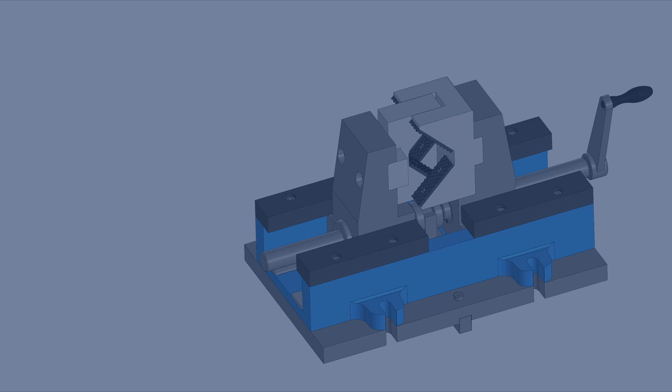In this lesson, we'll add 4 clamps to the assembly, 2 of which will be added by mirroring. Let's add the clamp. The vise assembly contains 4 such clamps. We need to place them onto the base on 2 sides. As usual, click by matings.

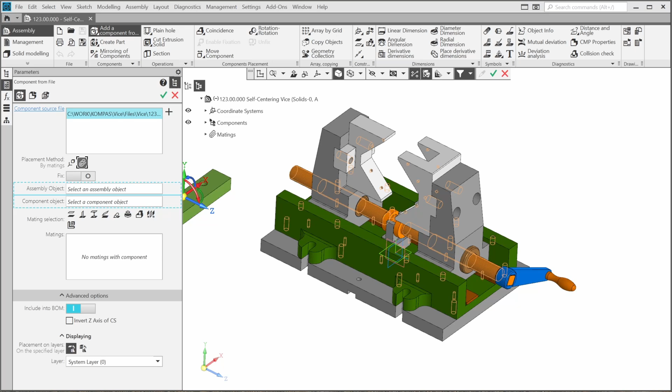Select the coincidence mating. Select the plane face of the clamp on the side that doesn't have the counter bore, and the face of the base. Make sure that the clamp has the correct orientation. The counter bore should be facing up.

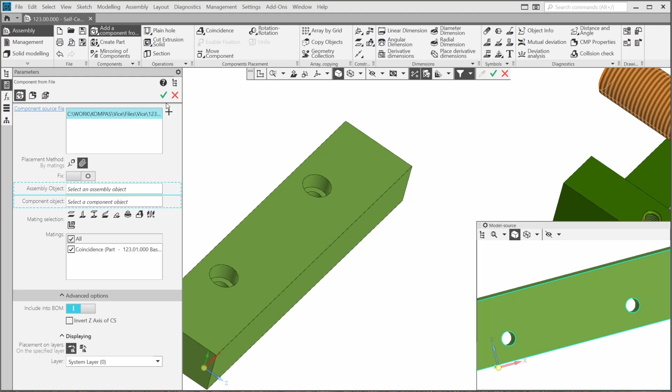Then create the coaxial matings for the clamp's holes. Note that the clamp isn't symmetrical, and the hole should be close to the outside of the assembly. And the second hole.

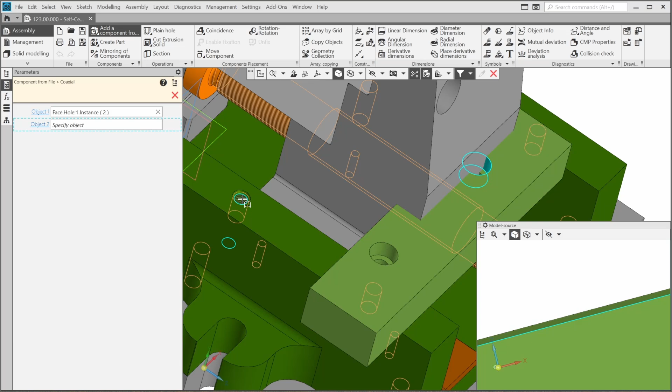Confirm. Let's add the second clamp in the same way next to the first one. Create 1 coincidence mating and 2 coaxial.

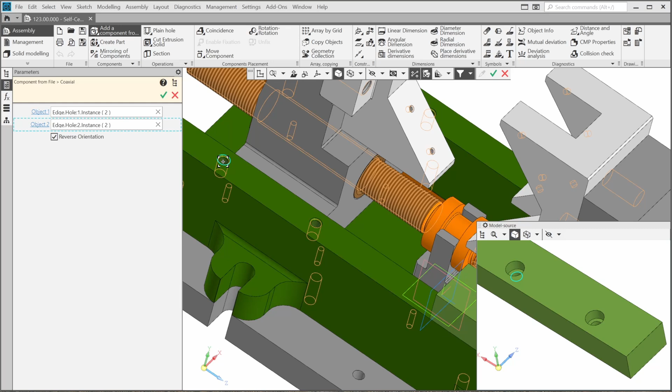Confirm. For the other clamps, we'll use a different method. So let's stop the command. I'd like to hide all these threads to see the assembly more clearly.

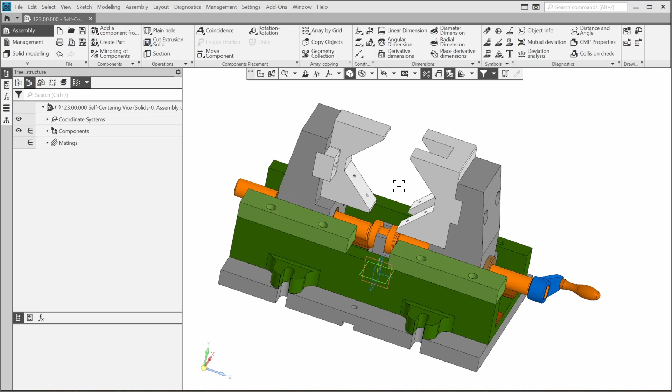The remaining 2 clamps should be placed symmetrically to the first 2 clamps. Let's use this feature and start the mirroring of components command. First, we need to select the symmetry plane.

As you can see, it's the red one. I can't select it in the graphic area, so let me turn on the additional tree. It's the ZY plane.

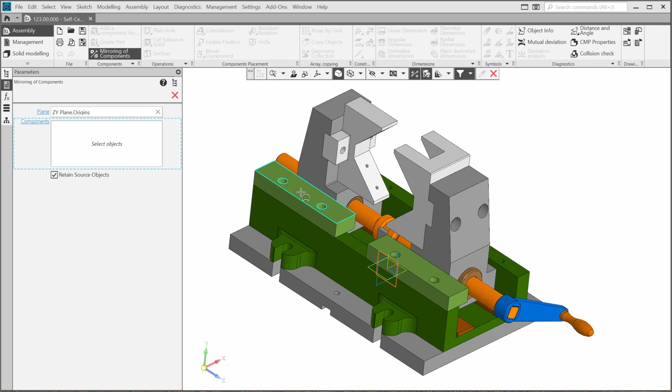Then select the clamps one by one. The preview will appear. Note that there is a special button instead of the standard Confirm button.

This button means we'll need to adjust some additional settings. Click it. The component mirroring window will appear. Here you can find our clamps. The window allows you to select an insertion method and choose from possible results.

There are 2 insertion methods. You can define the method for each component individually or for all of them at once. If you select the mirroring of component method, a mirrored copy of the component will be created. This is recommended for non-symmetrical components.

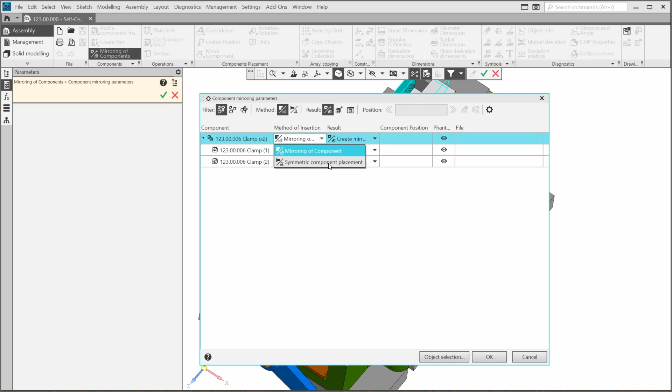In our case, we'll use the symmetric component placement method. In this case, the same part will be added, but in a mirrored position. The clamp is not completely symmetrical, so we'll get this incorrect result.

To fix this, we'll use the result options. There are a lot of possible results. Let's try them and find the best one.

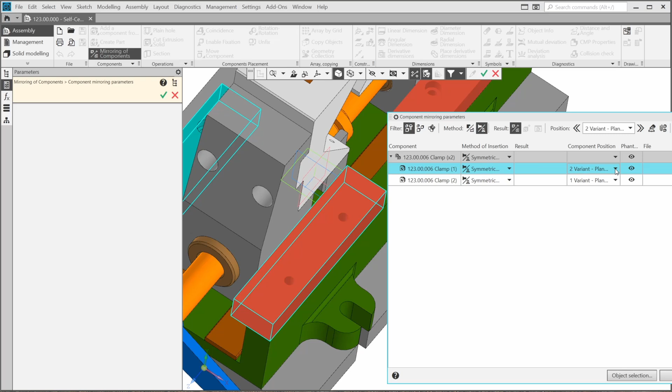Here the counter bore faces down. Let's try the next option. This one is perfect. Select the same option for the second component.

Note that you can use these arrows to switch between result options. Click OK. 2 more clamps have been added.

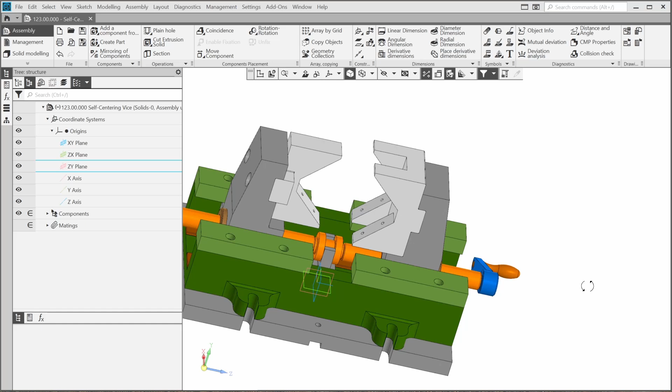Let's look at the tree. There is the clamp, or more precisely 4 clamps. You can see the number of elements in the parentheses next to each component. Note the plus sign next to the clamps, meaning the component's position is completely defined.

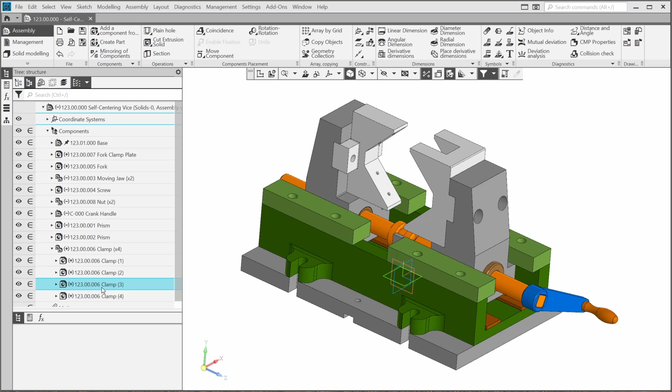Double-click one of the 2 mirrored clamps to review its matings. You'll find only 1 symmetry mating in the matings field, so we can conclude that the symmetry mating fully defines a component position in the assembly.